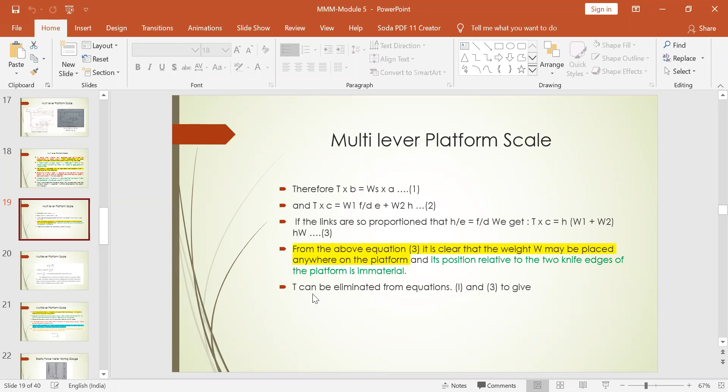Then you apply the moment equation and equate it with the given proportionality constraint. We come to know that the value of T does not affect the platform on which you are embedding the weights, and hence we neglect the tensional force from the equations, leaving only the relation to determine the unknown weight.

With the help of the unknown weight, we explain what M means, which is nothing but the multiplication ratio, and how you play with it to add weights on the pan such that the unknown mass applied on the platform can be balanced and its value determined, along with how the variation in the poise scale proceeds with the addition of weights.

Every scale tells you the reading with respect to the force applied on the arm in terms of kg. This movement along the y-axis, and similarly a movement along the x-axis, will also be shown on the poise scale, indicating variation in the x-axis.

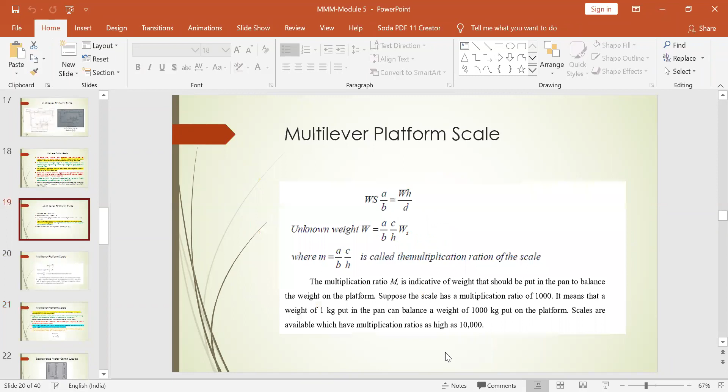That value of x, you will take out how many divisions it has moved. Similarly, the value of y will be the same in both directions, so it gets cancelled, and only the value of x affects it. This x value is determined by poise weight divided by A, where A is the distance located from the knife edge to the pan weights.

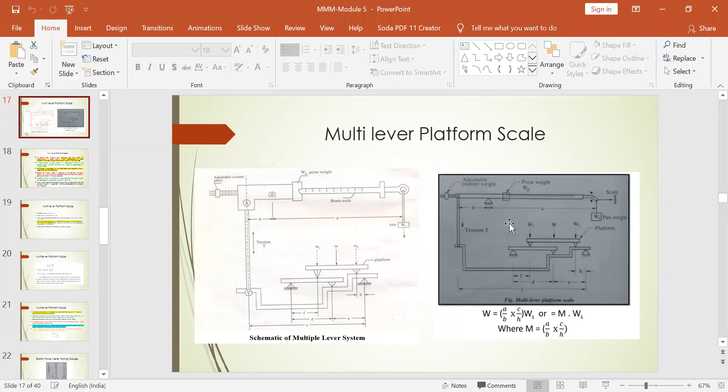So finally, this is how you will segregate the given weight into W1 and W2 and identify its value, how it varies, what is the effect of the load, and what is the measurement of the force with the help of the poise scale, which shows the equivalent force measured in terms of kgs.

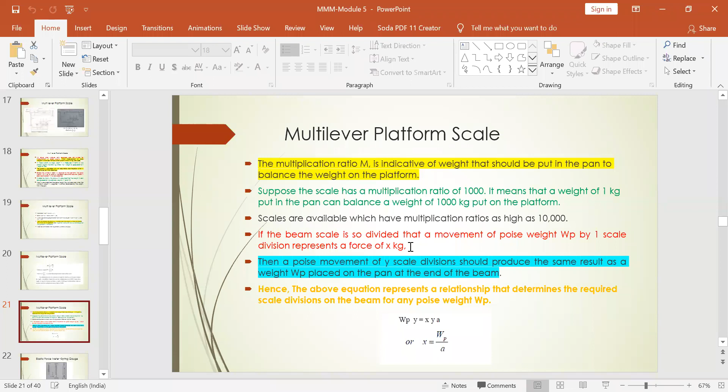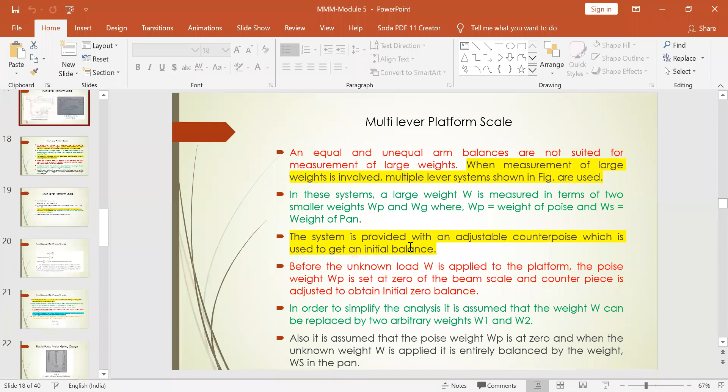So this is about the multi-lever platform scale. Apart from that, we have one more thing called the spring gauge. Going back to our classifications, we covered scales and balances where we had three types: equal arm, unequal arm, and multi-lever platform scale.

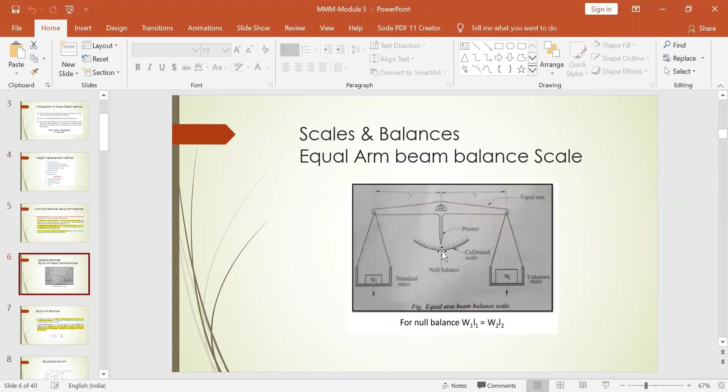After that, the other type of force measurement is through the elastic force meter. In that we have one classification called the spring scale. One example of the spring scale is our spring gauge. Many of you might have operated a spring gauge. Let me show you exactly how it works.

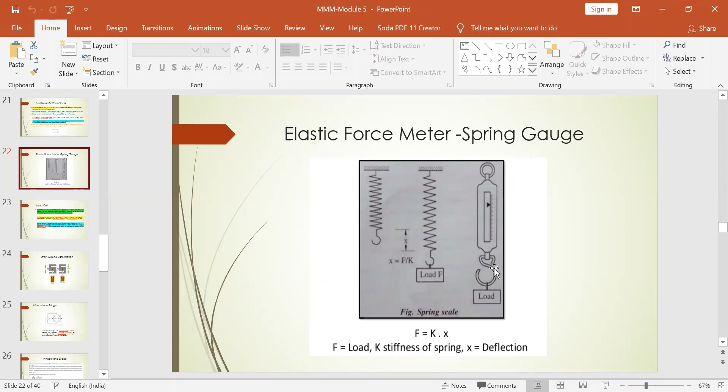It is called an elastic force meter, where we use a spring gauge. You have a spring and the stiffness of the spring is known. When you add some load to it, the spring gets expanded, and then you measure the value of the load being applied. This is a normal spring gauge, which you might have used in daily activities or in laboratories. The description related to this is not in the syllabus, but as per the classification, this is also one category which uses the elastic force meter.

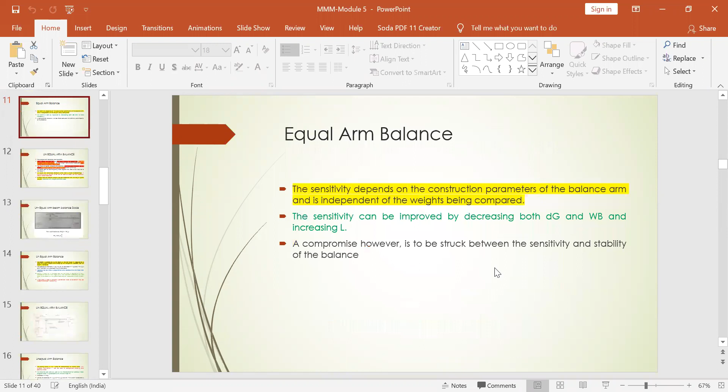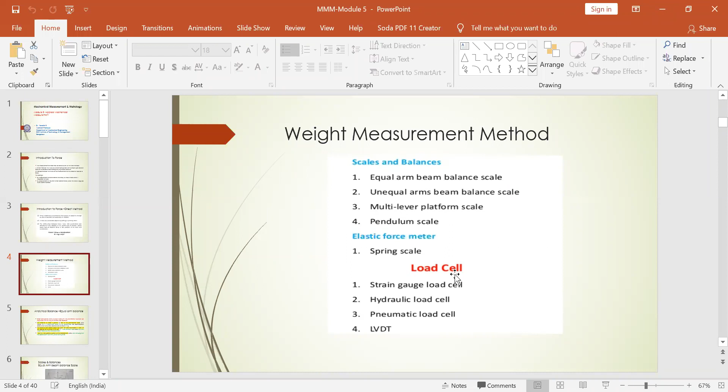Then the other classification is load cells. What do you mean by a load cell? Under load cell we have four categories: strain gauge, hydraulic, pneumatic and LVDT. All these come under the category of load cell, which helps in checking the load added to it and doing the calibration part also.

So what do you mean by a load cell? It is a particular type of transducer, which senses and converts input into the required output signal. It is specifically called a force transducer. All load cells fall into the family of transducers, specifically force transducers, because it converts a force - tensional, compression, pressure or torque - into an electrical signal, which can be measured and standardized. This is the main application of the load cell.

Under load cell, I told you different categories. One is the strain gauge load cell. For that you should know what a strain gauge is. As the name suggests, this is a device used to measure the strain of a particular object. It was invented in 1938 by Edward and Arthur. For strain gauge measurement, there is a need to use a Wheatstone bridge. Everyone is aware of the Wheatstone bridge - you studied it in 11th, 12th and also in your first year subjects.

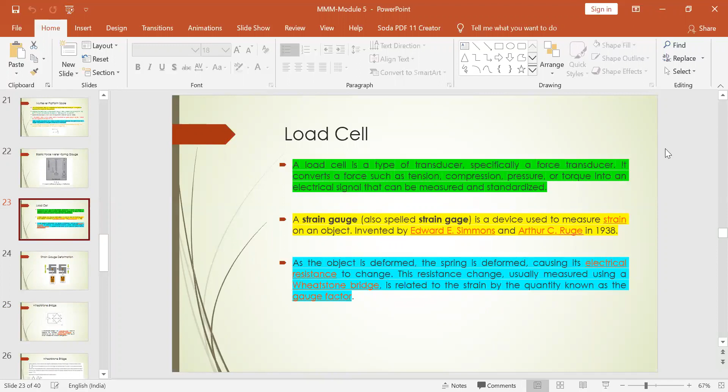So the strain gauge deformation could be either tension or compression force. As I told you, it can sense tensional force, compression, pressure or torque, which will later be converted into the electrical signal. This is how strain gauge deformation takes place.

Okay, so now before going into the strain gauge load cell, let's just focus on the Wheatstone bridge. The excitation voltage is represented by V suffix EX, a known constant. The output voltage will be represented by V naught. This is variable depending upon the shape of the strain gauges, so depending upon the shape of the strain gauges you use, the output voltage will vary.

So if all the resistors are balanced in the Wheatstone network, then it is assumed that R1 by R2 is equal to R4 by R3. In that case, our output voltage remains zero, and then we can say that the given Wheatstone bridge is balanced.

Suppose if the resistance of even one of the resistors changes, then the output also will change, and it won't be equal to zero. So if initially you balance it with this equilibrium condition, and you change one of the resistor values, then V naught will not remain the same. It will change accordingly.

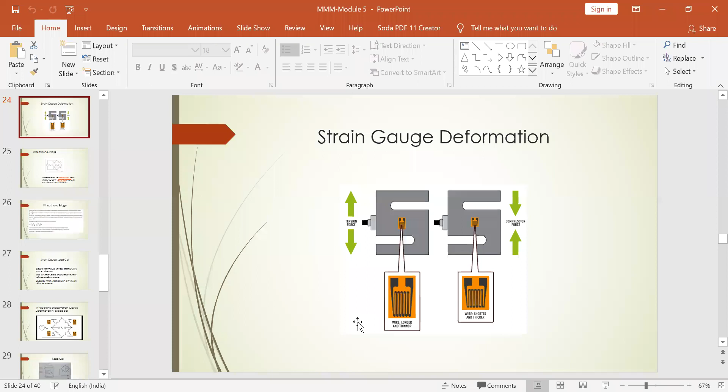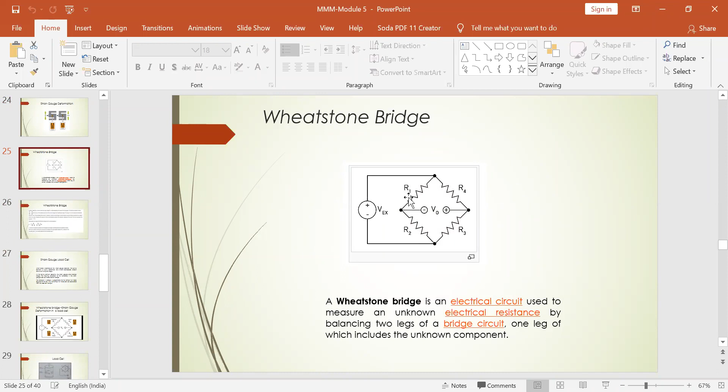So the resistors that were in the Wheatstone bridge will be replaced by strain gauges in case of a strain gauge load cell, which will be alternately arranged. So one you have tension, the other will be compression, and again tension and again compression. In case of the strain gauges, these replace R1, R2, R3 and R4.

So when force is exerted on this kind of load cell, the structure and resistance of the strain gauge changes, and once it has changed, we will evaluate the output voltage. From the resulting data, output voltage can be determined using the equation shown. You will just be replacing these resistors by the strain gauges, and you will determine the output voltage with respect to the deformation which happens in the strain gauge, which could be due to the tensional force or the compressional force.

So this is how the Wheatstone bridge looks for a strain gauge load cell, where you will have R1 associated with compression, R4 with tension, R2 with tension, and R3 with compression, so you will align opposite elements directly opposite to each other. This will be the excitation voltage which helps in deforming the strain gauge load cell, and here is the output voltage which you determine based on the equation explained to you.

So now let us focus on some aspects related to the strain gauge. When force is exerted on the strain gauge load cell, the spring element is slightly deformed. So you will be having the spring element in the strain gauge, right? This will be slightly deformed, and unless overloaded, it always returns to its original shape.

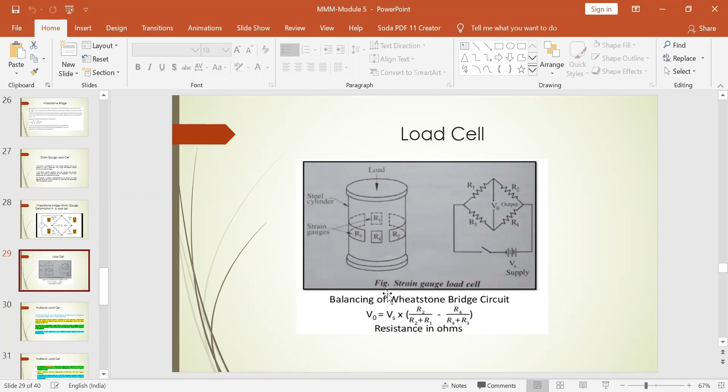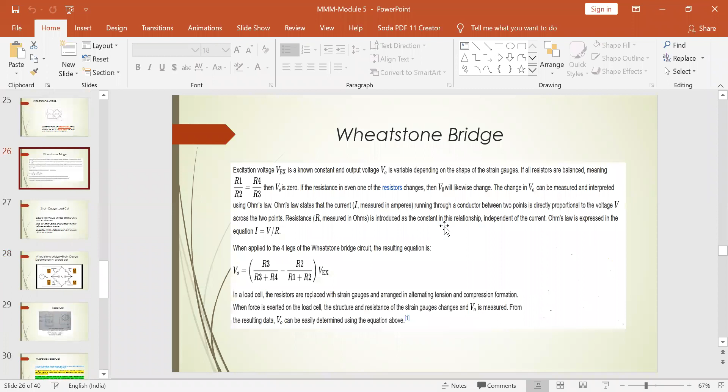So if they ask you to explain the strain gauge load cell, just speak about the strain gauge, throw in some concept on the Wheatstone bridge, and show how the Wheatstone bridge is replaced with the strain gauge load cell and how you determine the output voltage. So this is about the strain gauge load cell, and in the next classes we'll deal with other types of load cells and then go for measurement of torque and pressure.